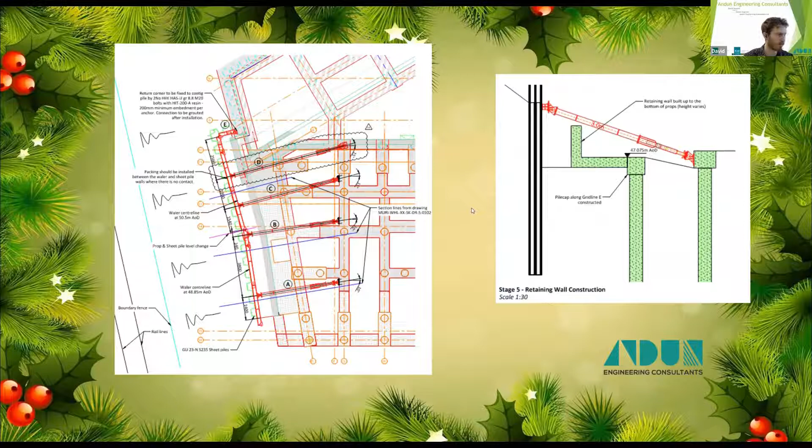The second interesting part of the project was the tower crane foundation. So this is an early sketch of the location of the tower crane. So around the tower crane, we had a contig pile wall on two sides. We had a number of services, so manhole chambers and things that were proposed around there. And then we had further permanent works ground beams to the south of the tower crane foundation.

When we started looking at this, we could not carry out a tower crane base that fitted in the gap that we had because of the pile spacing from the contig wall and the other foundations. So we elected to combine this tower crane foundation with the permanent works ground beam to the south, which gave us a solution that was a bit more complicated to design, but it did give us a workable solution that fitted in the space.

Because of the extra depth we had to put onto it to get beneath the ground beam, we had to go beyond what the contig pile wall had been designed for. So we also had to deal with some temporary propping to actually allow it to be installed. And that can be seen in this picture of when we went on to inspect it. You've got the propping just up above it to provide some temporary support until the base was actually cast.

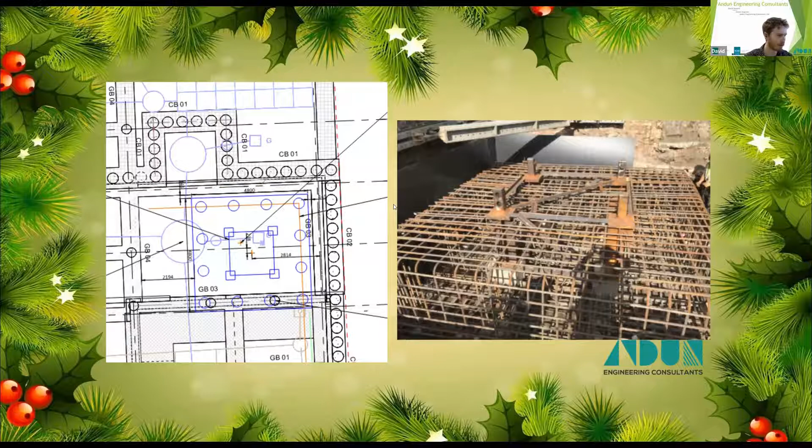So it was, again, another interesting little project that had a lot of tight site constraints and made a bit of a challenge. And finally, we've got a bit of a video that Bowmer's made, and this shows the construction as it went on, well, at least the groundworking side of it and their work on the site.

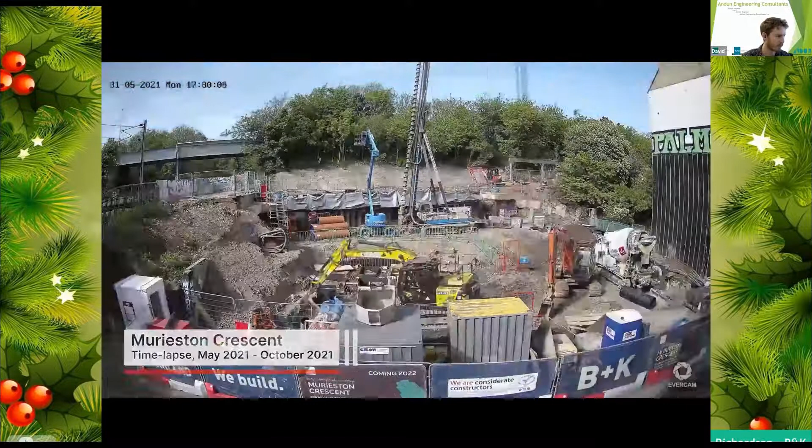So at the start, you can see them looking at the central core and ground beams in that area prior to them doing the propping. So the railway is to the left of the site and the tower crane base was on the back right-hand side. You can just about see the propping going in there.

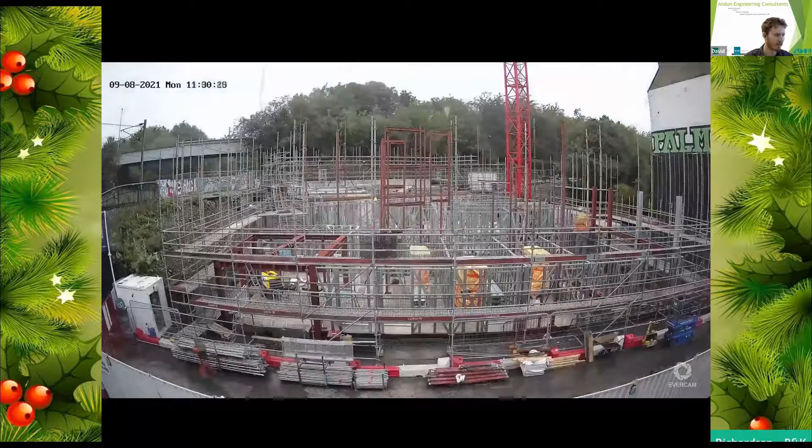And you can see the sheet piles going in now for the embankment and the propping, and they quite quickly got the wall constructed, backfilled against it to allow them to remove the propping. And yeah, the tower crane went up fairly quickly. So that was kind of our main involvement in the start of the project. So I'm going to hand you over to Josh now, I think, for a bit on a bridge demolition scheme.

Wow. Thank you, Dave. It's just next one. There we go. Right, back one.

Okay, so thank you, Dave. In a similar vein to Dave, I'm going to talk to you about a couple of key project highlights that I've had in my year. I've had the opportunity to work on some fantastic projects, but I'm just going to bring you a couple. The first of which is the Heartlands project for HS2. This covered the demolition of a 100 metre stretch of road bridge in Saltley, which is near Birmingham.

The bridge was removed over 4 weeks between August and September to make way for the northern section of the HS2 phase 1 route between London and the West Midlands. The work was carried out by John F. Hunt Regeneration, and they were the demolition contractor, and they were working for the main civils contractor, who was the joint venture of Balfour Beatty and Vinci, BBV.

The subcontractors were Podtrack, who looked at protecting the rail tracks, but also included us, who provided the temporary works design for the demolition works. You can see the bridge there on the right, and it had 3 spans, the central span being over the railway line.

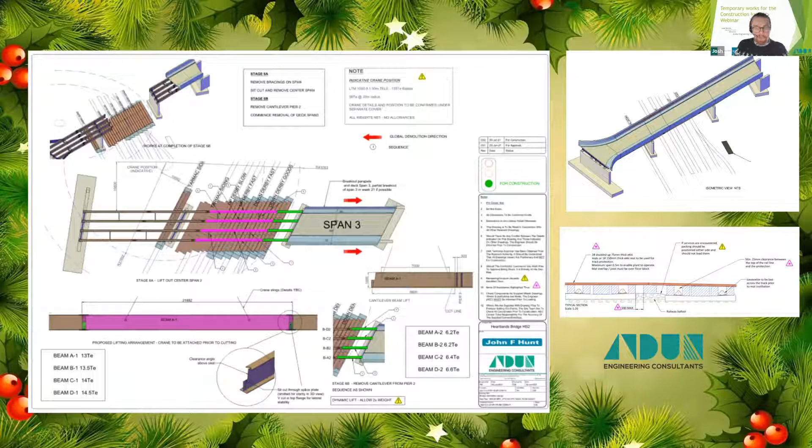We also produced the Form 2.3 that was required for the Network Rail submission. And then another item that we designed was the temporary stability system of the structure during the dismantling sequence, which I'm going to just talk a little about here. So one of these systems is shown on the right-hand side, and this was required as the head restraint and the diaphragm bracing of those steel beams was removed, and we wanted to ensure that they remained stable whilst they were being prepared for lifting.

And the detail was to run a strap from 4-ton bags of ballast up around the flange through a hole in the web and back round to another 4 bags, which was on the other side.

And this effectively prevented the tall, skinny beams from toppling over. We also carried out the crane position, which is shown up on the top right-hand corner. And it's worth noting at this point that the pads, because we were operating adjacent to railway, it requires adding on an additional factor on top of the outrigger load, which is in accordance with the CPA guidance, which is pictured at the bottom there. So this is a factor which is over and above any partial safety factors that's required for design codes.

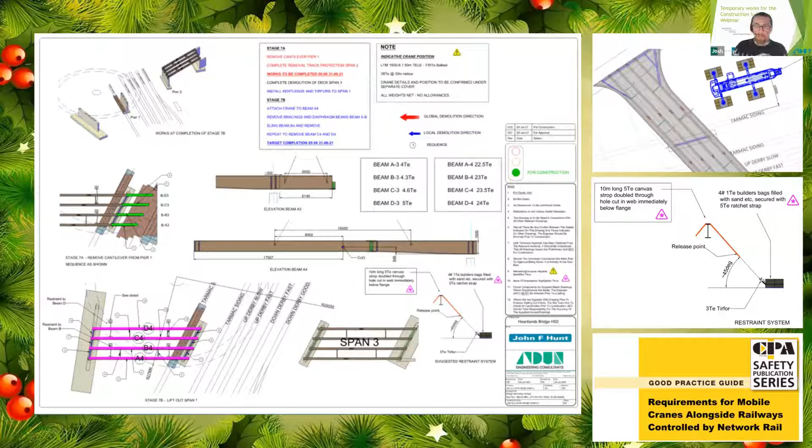And the CPA guidance states that the load should be multiplied by a factor of 1.33 to increase the level of safety of the foundation absorbing those loads. And you can also see here where we've shown the lifting sequence and weights, which were then incorporated into the RAMS.

The final stages, once the majority of the structure was removed and the span that sat over the railway lines was taken away, we had span 3, which was removed using mechanical demolition methods, so a larger excavator breaking out the concrete, and then the steel beams were removed using a controlled collapse mechanism with a plastic hinge. So the beam is cut by a burner from the bottom up, and eventually the self-weight of the beam causes the beam to sag onto some pre-prepared debris stockpiles, and then it's processed and demolished.

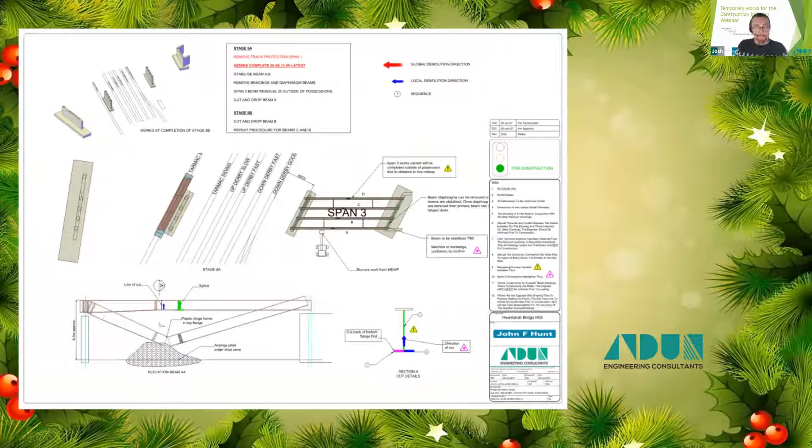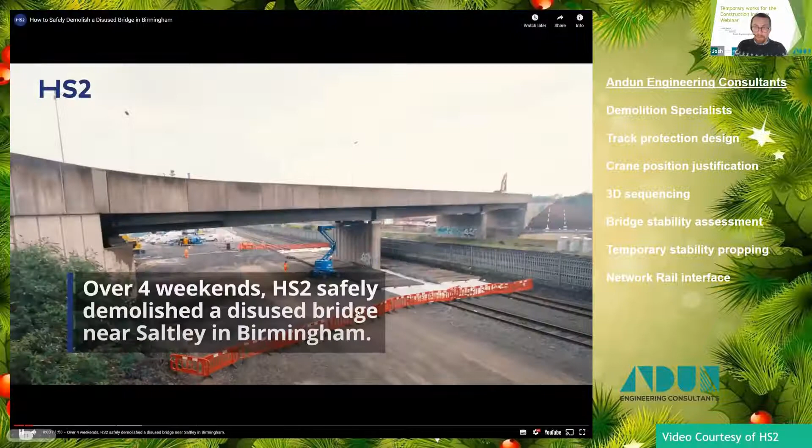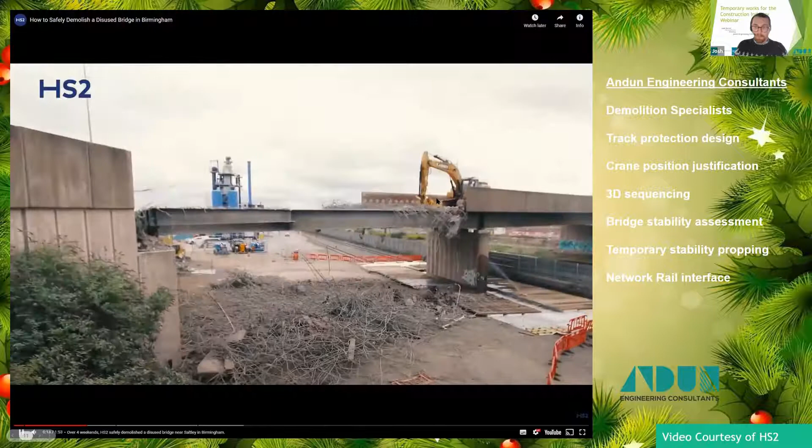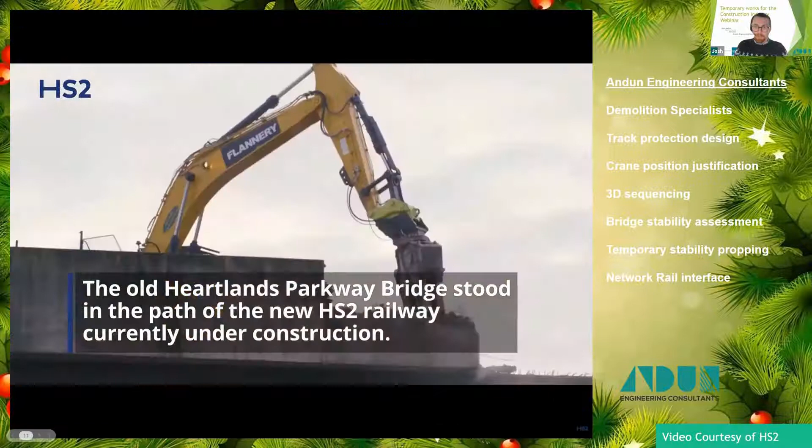And so that was the theory. We've got a video here which kind of shows the works in practice. So you can see here they're taking out the parapets and the concrete structure by mechanical means.

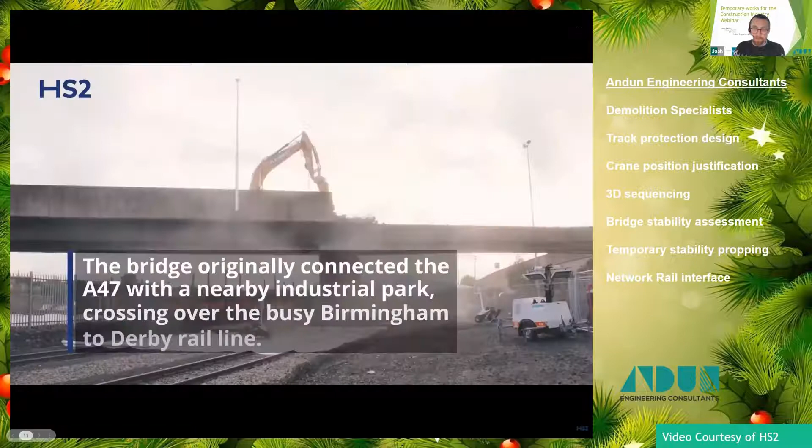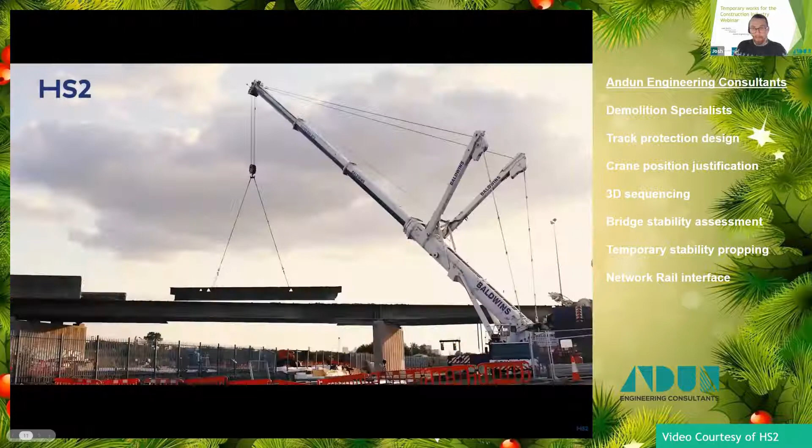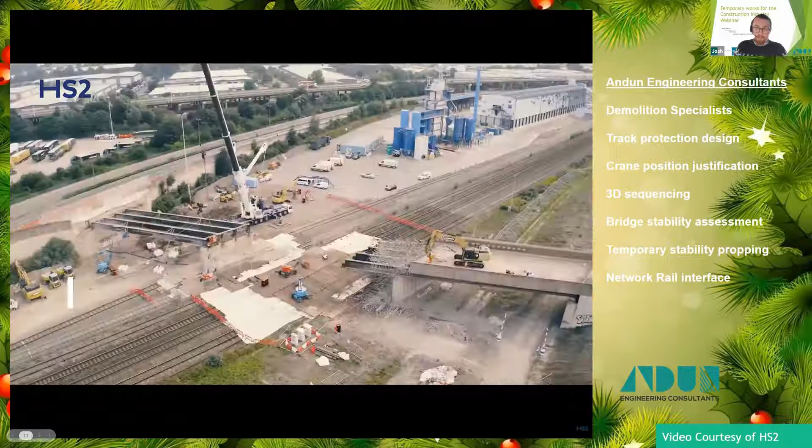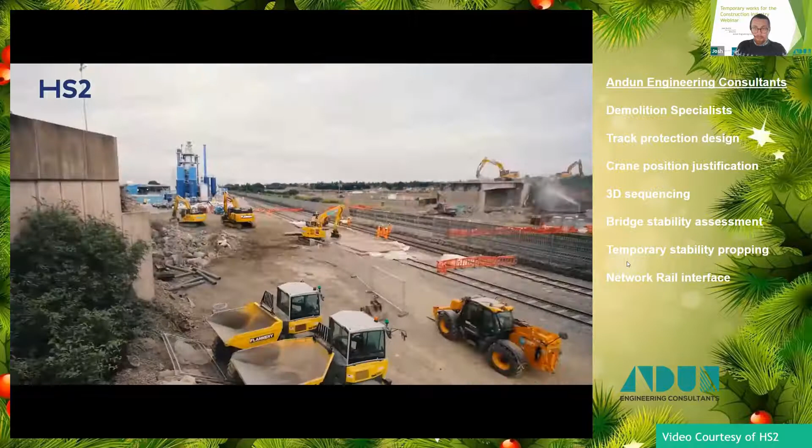And then once the deck was removed from spans 1 and 2, then we could come in with the mobile crane and start lifting some of the steelwork away. You could see there some of the diaphragm braces between the steels, which provided lateral stability, but they had to be removed to enable the beam to be taken out. And that's the final span coming out there.

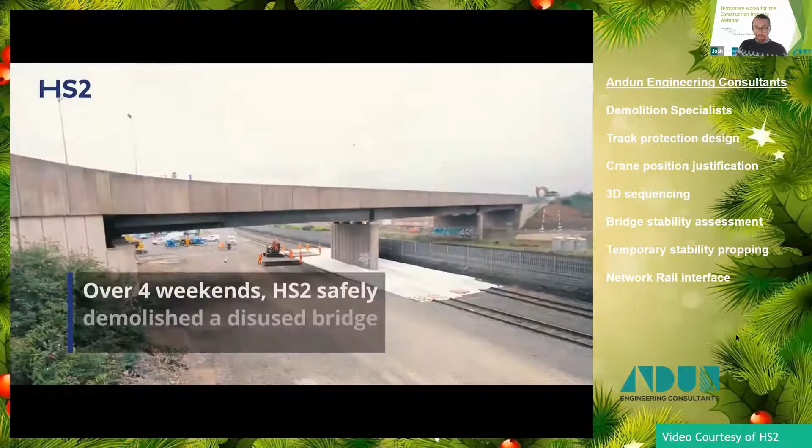So now from the bridge demolition to Scunthorpe, and the tale of two chimneys is what I'm calling it today. So that's two chimneys of different construction, and we dropped those in a similar fashion, but it required a different methodology due to their location and construction.

The principal contractor was the demolition contractor Sam Evans and Sons, and the client was British Steel. Specialist Explosive Services were the explosives contractor for the chimney that was blown down using explosives, and we were the demolition engineers providing the design for them both.

So we'll start off with the first example, which is the pull down, or push down in this case, of a steel stack. The structure was approximately 5 meters in diameter and 56 meters tall. It had an outer shell and an internal liner and had a significant section change at about 5.5 meters above the base, which you can see there in that photo. The section change and the intake pipe, which is coming in from the right hand side, had quite an impact on what we could do, because this meant that we had restrictions on the pre-weakening. Therefore, if we made the section and had the pre-weakening higher up, we could effectively choose where we wanted to fell the chimney.

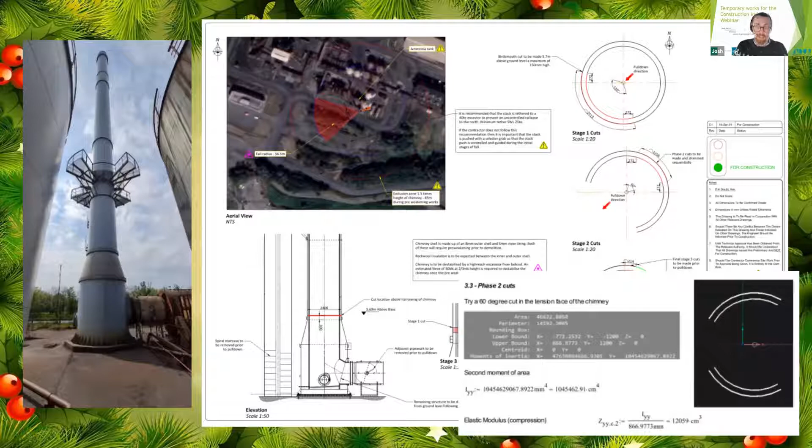The structure in this case was pushed down using a grab attachment on the end of the excavator, and this meant that the grab attachment could kind of saddle itself on the profile of that circular chimney shaft and make sure that we could put the suitable force on there, which was pre-calculated during the design, and then induce the collapse. And here's how it went on one Sunday morning.

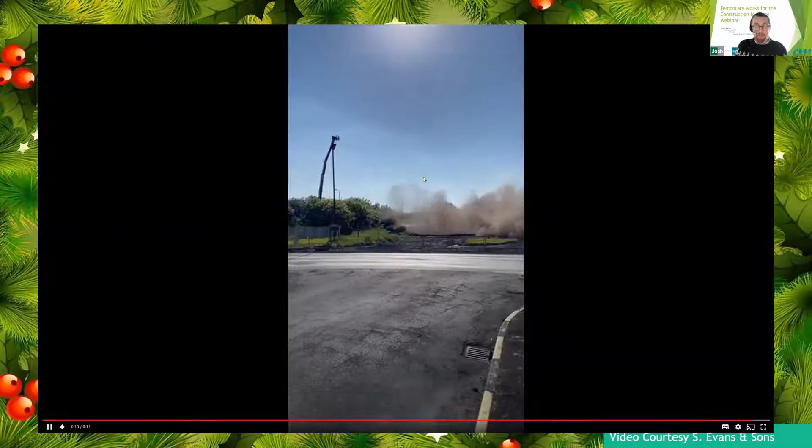And that meant that all that structure could be processed safely from the ground. That's the intent. And so now onto the other chimney, which was a concrete one and much taller than the steel stack. This chimney was 78 meters tall and nearly 1,000 tonnes in self-weight.

It had a concrete outer ring and then a brick internal liner. There was a large hole on one side of the chimney where the flue came in, and this hole was so large that we couldn't avoid it at all. So we had to work with that opening, incorporating it into our pre-weakening sequence. And fortunately, we were able to make it work so that the chimney dropped in the safe zone and away from the live conveyor systems, which were to the west and south of this chimney.

And then this chimney, as opposed to being induced by being pushed over or pulled over, which we saw in the previous example, was induced by explosives. So there was a strict preparation sequence involving test blasts, pre-weakening, heel cuts and hole drilling for the explosives. And then again, the design check included the review of the structure at each stage, checking the stability of the different sections and ensuring that the thing remained stable until we blasted out the final section and induced that collapse.

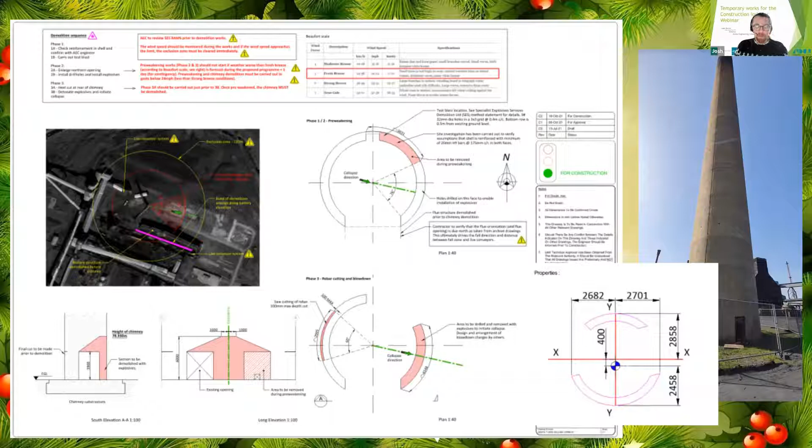And the idea is, once all the planning is in place, the demolition can commence. And the philosophy with any pull down or blow down is to get the structure on the ground so that then it can be processed using heavy plant working from ground level. And we want to reduce the working at height due to it being a significantly dangerous activity in the construction industry.

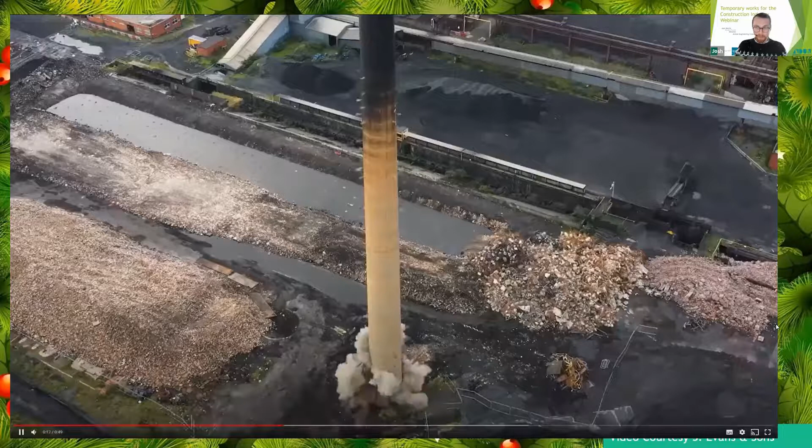So this type of demolition is high risk, yes, but it's for a very short period of time, and controls such as a site-wide exclusion zone can be implemented, so that keeps the overall risk much lower than alternative methods, because it's high risk but for a very short limited time. And here's how this one went. It's a short video. So the initial blast to remove that final section of the structure.

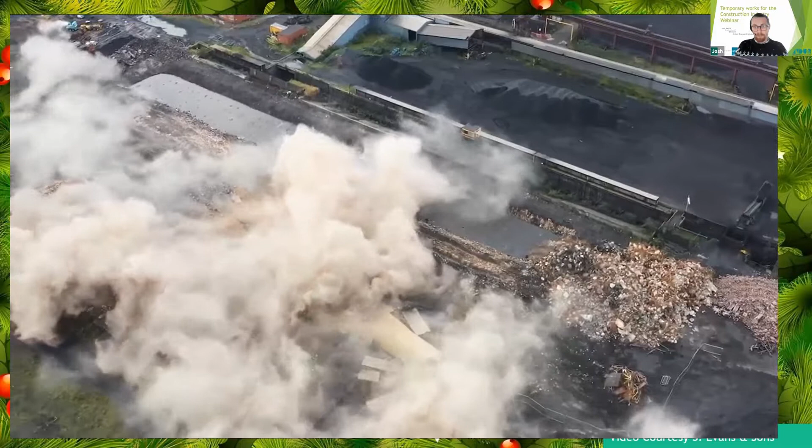And then I will hand you over to Angus. Stop controlling it, Josh. Yes. There you go.

Good morning. So I'm going to talk to you today about Eggborough Power Station with a nod to Josh's title, which I stole and tweaked slightly. This is the tale of 8 cooling towers, which, as we all know, is better than 2 chimneys. So this was, or this is still a job for DSM, and they use Specialist Explosive Services as well for the demolition, the explosive engineering on the scheme.

And we were the structural engineers, so responsible for checking the structure for the pre-weakening works and making sure it's going to stand up when we want it to, and hopefully fall down when the explosives go off. Hopefully is the word I use, because it doesn't always happen. In this case, it did. Bit of a spoiler, but yeah, it worked. So they tackled them in 2 sets of 4, the first 4 in August and the second 4 in October of this year. DSM are actually demolishing the whole of Eggborough Power Station, but this was the first major bit to get done.

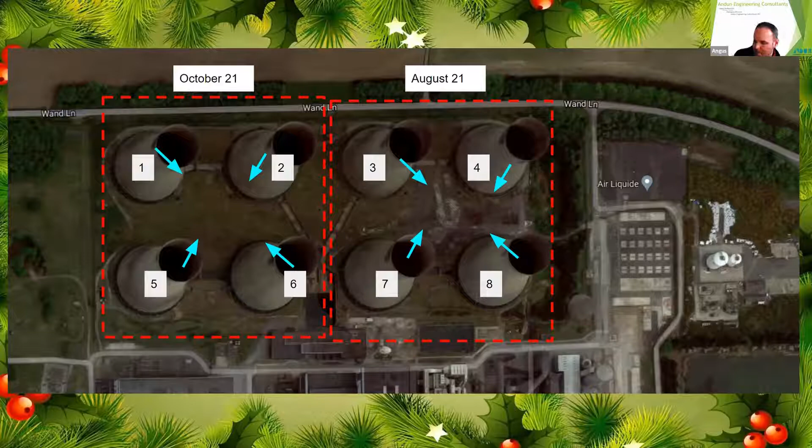And I can assure you, when you stand underneath those towers, the wind really does whistle under there, really does cause I think almost like a vortex around them. It's incredibly windy, even on quite a calm day. So, as I said, we did the engineering work on this.

The first phase of that was proving you could take out one of the diagonal columns, and a bit of the lower wall that allowed plant access inside the cooling towers, and strip out all of the grillage, cribbage, which sits inside it, over which water runs to cool the exhaust steam. So that was the first phase of the works.

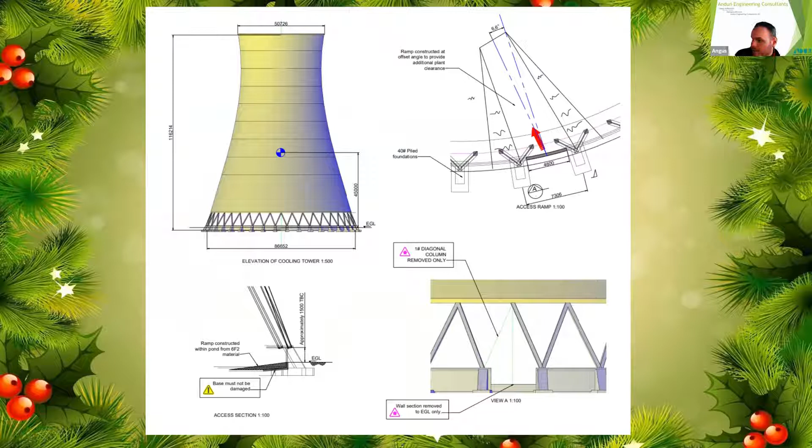The second phase is to prove that the pre-weakening doesn't cause the towers to become unstable. Now that has two parts. The first bit being they do what we call a pre-blast or a test blast that just demonstrates the amount of explosive required to weaken the shell sufficiently.

So they'll choose a small area of the structure, typically one leg on a cooling tower, and they blow it just to prove that they've got the amount of explosive correct, and get an idea of how it's going to fragment, how far fly is going to go, that sort of thing, and whether their proposed protection around the explosives is going to do the trick.

SES obviously know their stuff. They've done enough of these now to know with a good deal of certainty what's going to work. But these ones had been strengthened: you had the original shell, then a grout, before a spraycrete, and another layer of mesh. Again, it was important to check that they actually behaved as we thought they would.

The idea with these towers is to blow out two thirds of the circumference on the side that you want it to fall, and the same with the columns, roughly. You blow those, and then gravity does the rest for you.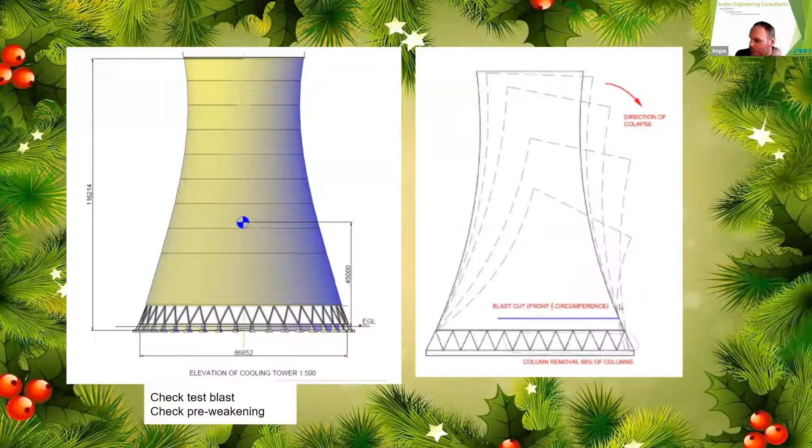So this was, I took my sons along to watch this, because it's quite a spectacle. So we all got out of bed nice and early, drove down to Eggborough. Got some nice bacon rolls from DSM, which was good. And then got to stand there and see this in action, which was quite something. The first cooling towers I've ever been to see blown down, that's for sure. Had a good view.

So that was quite an exciting morning. The boys still talk about it now. In fact, we got given these special passes to get us onto the site, and Cameron's got it on his bedroom wall still. I think it's a day they're going to remember.

But the most amazing thing about it, in fact you can see it if I replay it. You see the flash of the explosives, you see it start to move when it gets going. So you see the explosives, and you don't hear the explosion for quite some time. That was the weirdest thing about it. You'd have thought, given how far away you were, it'd almost be at the same time, but it really wasn't. It was quite strange, quite surreal.

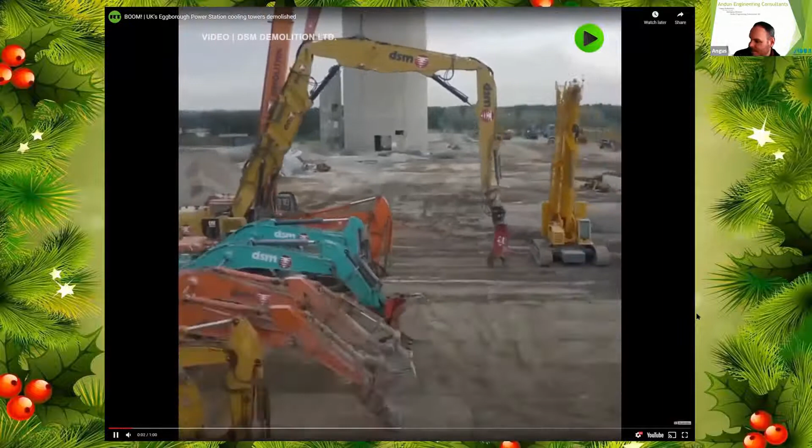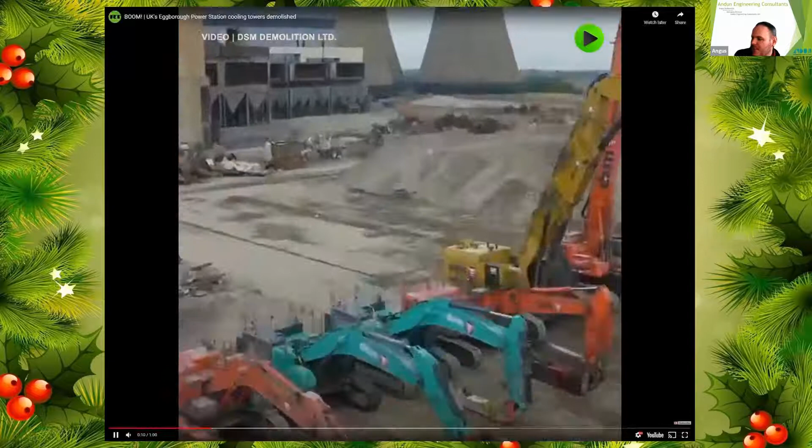And then we have the proper video that DSM did, which is a bit more spectacular than that. Not quite that great quality, I think I must have got a low-res version of it. You see all their plant there, including the Super Beast they have, their huge high-reach machine. And this is actually the second one. You can see the first four there, which we went to see. This is the second four going down.

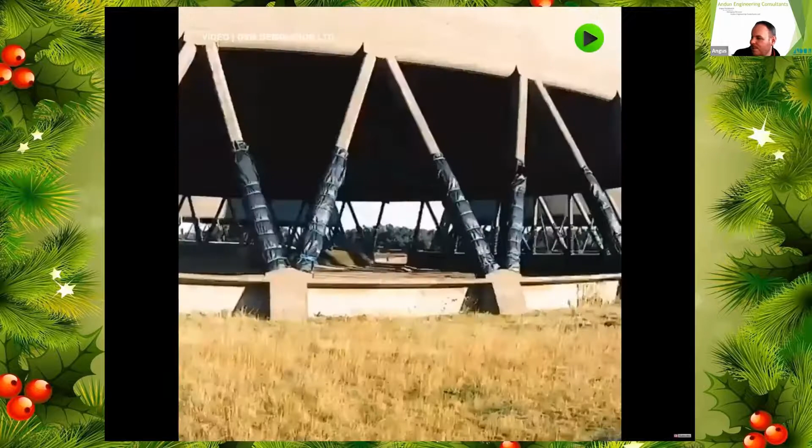It's always amazing the way the concrete folds up. It's almost like it's paper when it folds up as it comes down. It's incredible. See how flexible it becomes. And interesting to see how one of them actually shears off, rather than folding quite nicely like the other three. One of them shears off. Yeah, that one.

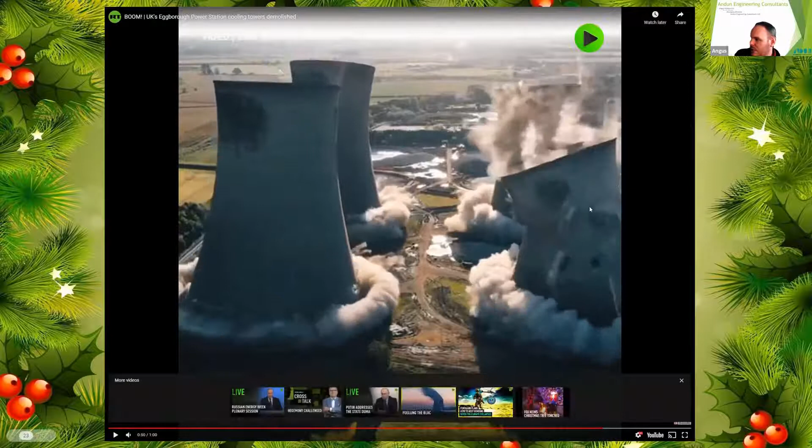You can see there it is again. That one really shears and folds in on itself, whereas the others don't quite behave like that. It's almost like there's a weak point around that at a high level there. It's interesting to watch how they behave. See it again.

And then on to probably the other extreme, so from the heavy demolition that we do quite regularly down to the smaller scale projects that we get involved with. So this is for Walters out of South Wales. Worked with them for many, many years now. And they are on a framework with, I think it's Somerset Council.

And the scheme they had was to repair an arch bridge in Misterton. So this bridge was originally strengthened back in the late 90s, early 2000s. Clearly something wasn't done properly, because it was racking itself to death again.

Very, very shallow cover over a very small arch and quite a heavily used road. I think that if this road's closed, the diversion is quite a long way around. So it was regularly getting battered by 40-ton artics, which was not doing it any favours.

So main road through Misterton, and you have what is quite a small and a shallow arch. So you're only talking about 500-600 mil high from the soffit of the arch to the bottom of the stream bed, which meant a traditional timbering option wasn't really going to be that suitable. However, the end section there, you can see how it's kind of on a skew here. That bit there was done with traditional timbering, which you can see there.

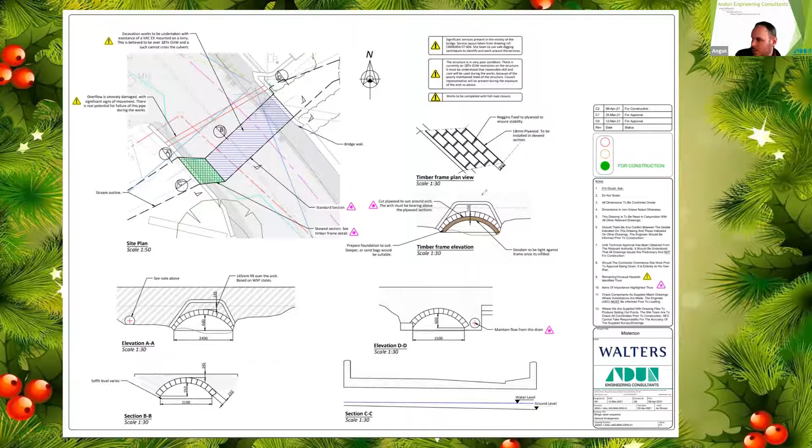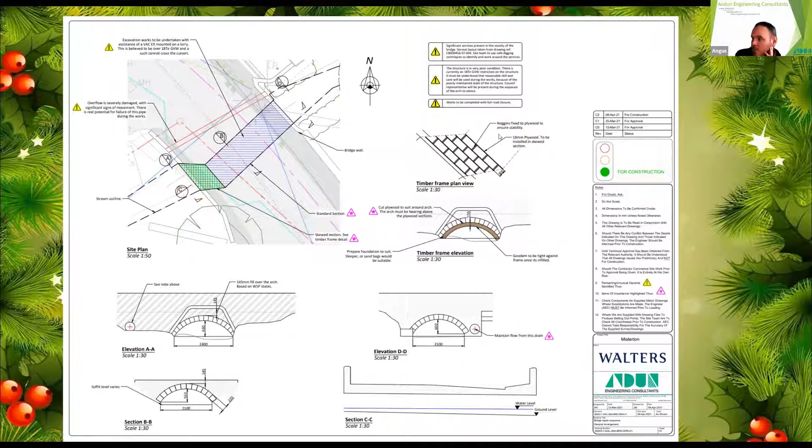Whereas the rest of it, we went with what I think is a one-of-a-kind solution. So I found these things called Geodams, which are effectively a waterproof terram, that are usually used for temporary flood control. So if you get these, you fill them up with water, they make effectively a wall from 0.5 metre high to 1.5 metres high that you can use to prevent floodwaters entering. So they look a little bit like that.

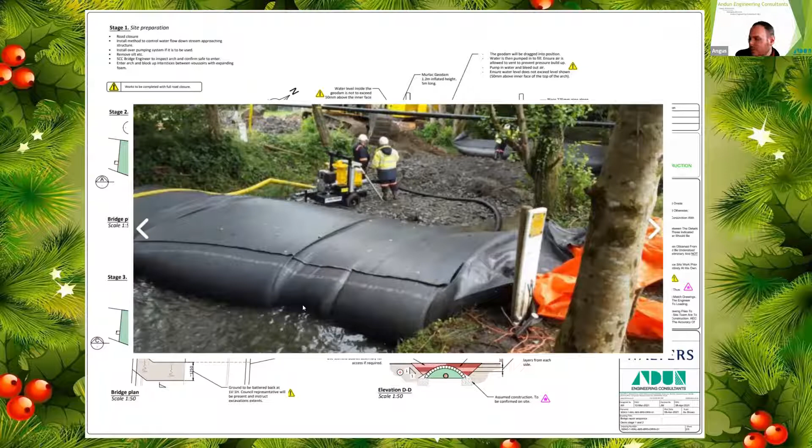So that is a Geodam that you literally just pump water into one end of, and it just fills up, and the self weight of it keeps it sitting there and keeps it stable. So I proposed to get one of those and put it inside the arch. The advantage being you haven't got to try and crawl in there and make the timbering. Nobody's got to work underneath it, and it will provide a nice uniform support to the full inside of the arch.

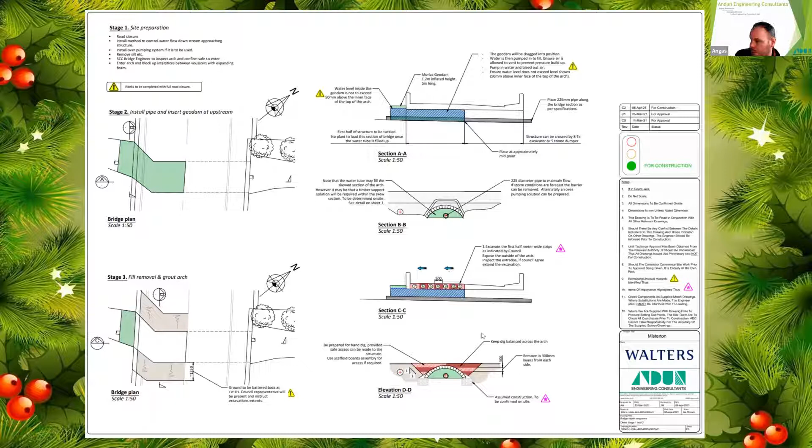And then there's the full sequence of how the works had to be done. So section by section, try and keep the load balanced either side, etc. Do one half of the bridge at a time so they could run plant past the other side, and then reinstate everything. Repeat the other way around.

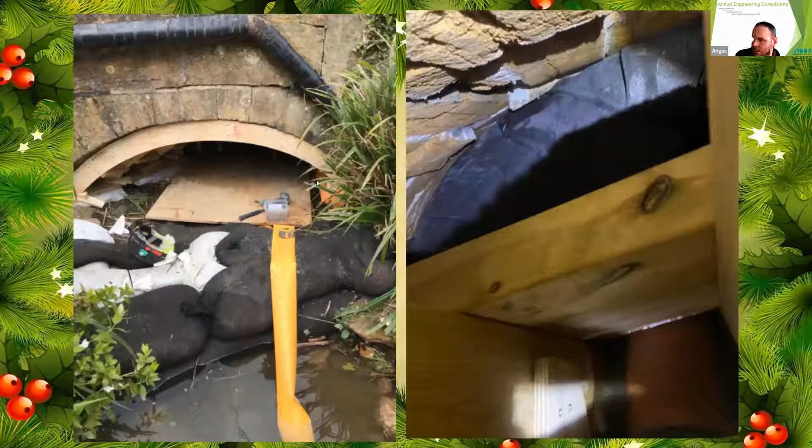So there you can see the timbering in place on the outer side where it has a bit of a skew, and then you can see there the Geodam sitting inside the arch. It's very difficult to get a picture of because of the constraints, but you can see it there inside the arch, filled up with water, and that's putting a pressure against the inside of the arch and keeping it stable.

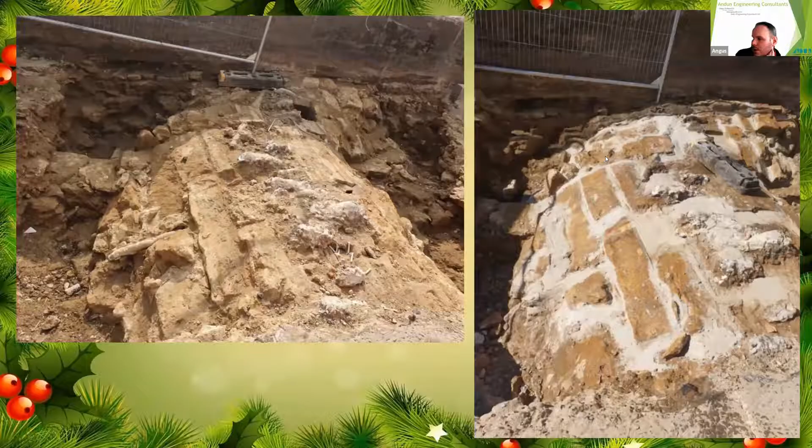And there's the back of the arch exposed, so it wasn't in the best of condition, and you can see the road's only 300 mil above the outside of the arch here, the crown of this, at its shallowest point, which is not a great deal for quite a slender arch. And there you can see when it's all being pointed up by the guys from Walters, did a nice tidy job. And then all the road construction was built back in, compacted.

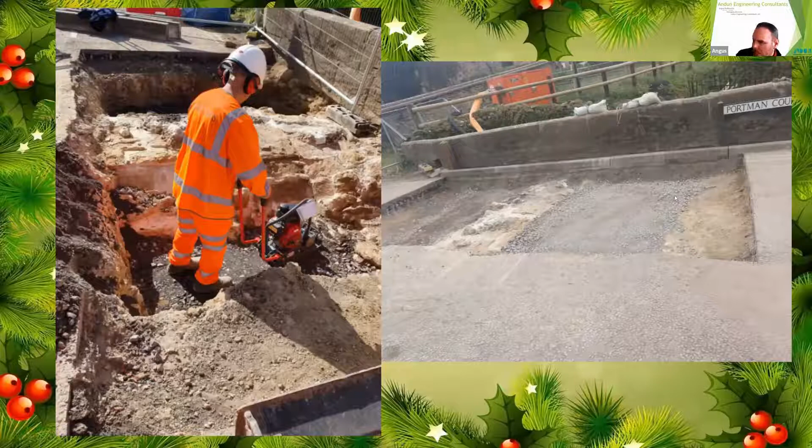Away you go, and now you can go on Google Maps. This was done in November 21, and you can see there the fully reinstated road is back in place and hopefully fit for more than 10 years. But we'll see on that front. I would hope so. But you couldn't even see there was really an arch bridge there.

And unfortunately, this arch bridge was listed, so the cheapest option would have been to have ripped it out and replaced it with a modern alternative, but it was listed and protected by English Heritage, so we had to reinstate it and try and maintain as much of it as we could, which is what drove the whole methodology.

Now, the temporary works flowchart we have is probably one of the most downloaded things on our website. And we've been saying for some time now, and Christian will tell you how many times a month he phones me up and says, have you done that flowchart yet? Have you got the new flowchart ready yet? Have you finished the flowchart yet?

So finally, we had a bit of a brainstorming session and we decided, you know what, instead of making a massive bulky A0 flowchart, which is what we had done for the new version, the feedback we've had from people was that it was not particularly user-friendly because of the size of it and everything else. Even on a screen, it was very difficult. So we've taken the decision to go with a website.

So this will be launched in the new year. But this is just a little video of what it's going to look like. It will be in a members only website. We're not proposing to charge for it or anything like that, but it will be a members only website.

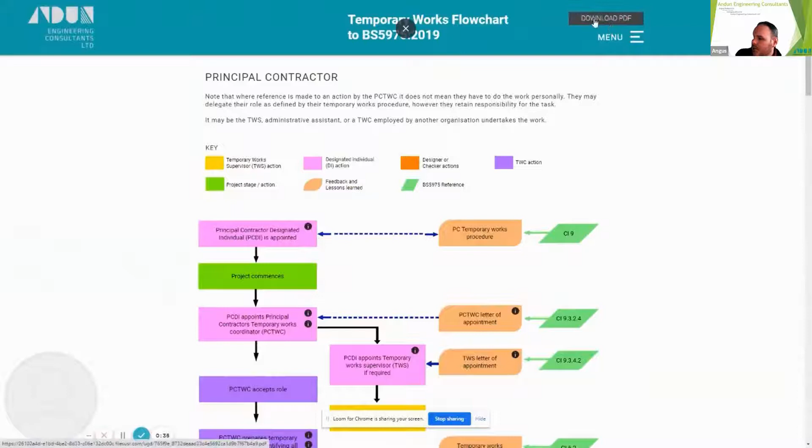This will be the landing page where you'll have the choice of clicking on principal, managing contractor or subcontractor to see which part of the flowchart really fits with what you're doing, because 5975 differentiates between those roles quite heavily now. And there we have, you'll even be able to download the PDF if you so choose to have the full PDF. But the idea is this website will be the point of review and the point of assistance for

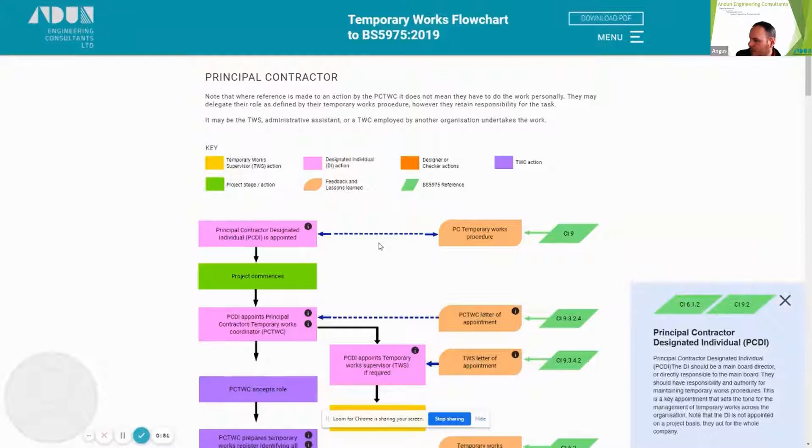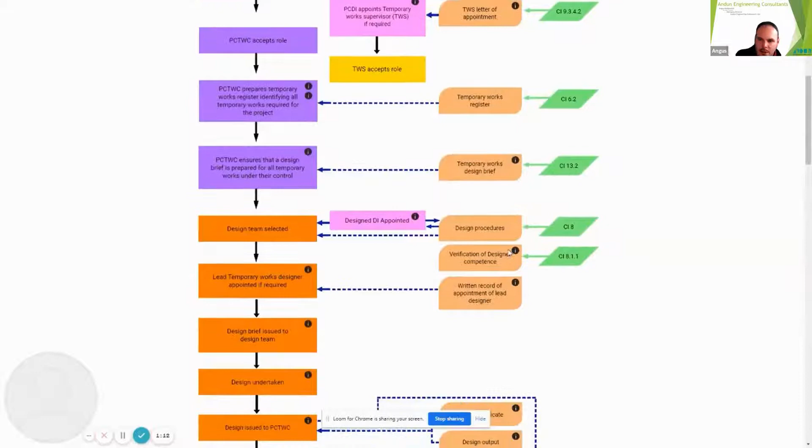yourselves. So you can see, instead of having a box on the side, you have these little information tabs that you click on, and up pops the information that we've written there and refers you to the correct clauses of BS 5975. And we feel this makes a much cleaner experience for everybody. You can look at the flowchart if you just want to understand the process. If you want to go into more detail, you've got the information. And if you want to go into full detail, it takes you straight to the relevant clause on the right hand side there of 5975 2019.

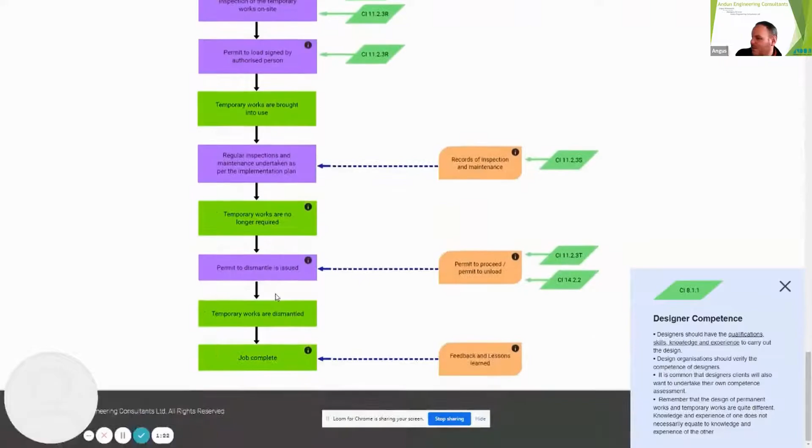So the only question that remains is, how long is this going to be current before the new 5975 comes out and we have to do it all again? But that will teach me for not getting on with it, I suppose.

So hopefully by the end of January that should be live, and it will be on, what's the website going to be, Chris? Temporaryworksflowchart.com. That's the one. So that'll be out in the new year for everybody to enjoy, hopefully.

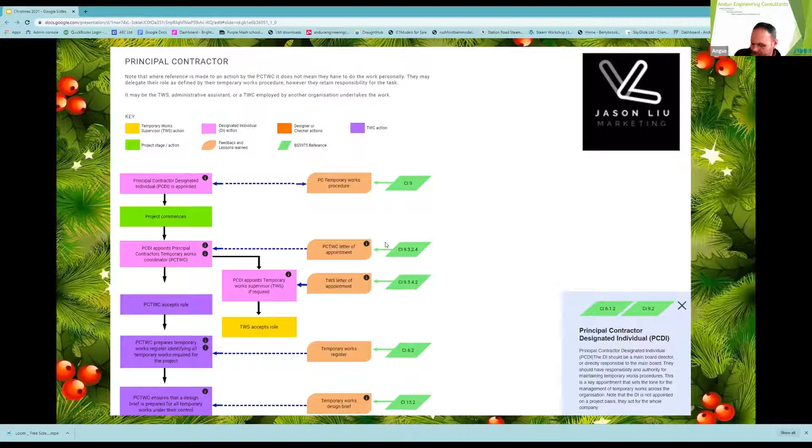And just another snapshot there of the principal contractor option.

So a thank you to everybody from Andun who's put together a presentation this year. It is quite some undertaking to do. Once a month's bad enough. When we were doing it once a week, it was a nightmare, but once a month it still comes around too quickly for my liking. But we've all managed it, and thank you to everyone from Andun who's presented this year.